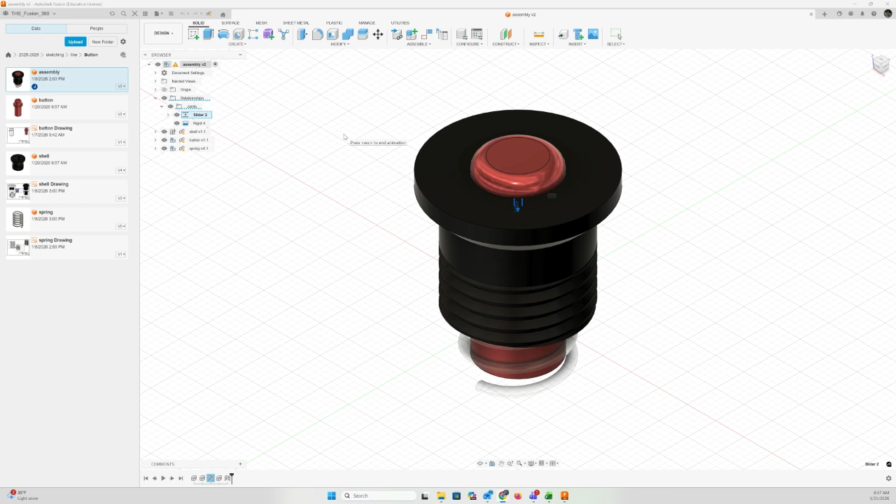We're going to start off with the button first. This is our first assembly and our first component. Let's bring up the diagram for the button. We're going to build the button and the shell, taking different approaches to demonstrate a couple different ways of creating things like this. This is actually a pretty simple cylinder we could build up, but I'm going to use the revolve tool in this particular case to demonstrate how the revolve would work.

Let's move this off to the side and get started. There's the dimensions. The first level is 20 millimeters in height, 12 millimeters in diameter for the top and bottom sections. This is 16 millimeters in diameter. This middle section has a little shelf that keeps it from going too far up. 8 millimeters above it, we've got a filleted edge with a 2 millimeter radius.

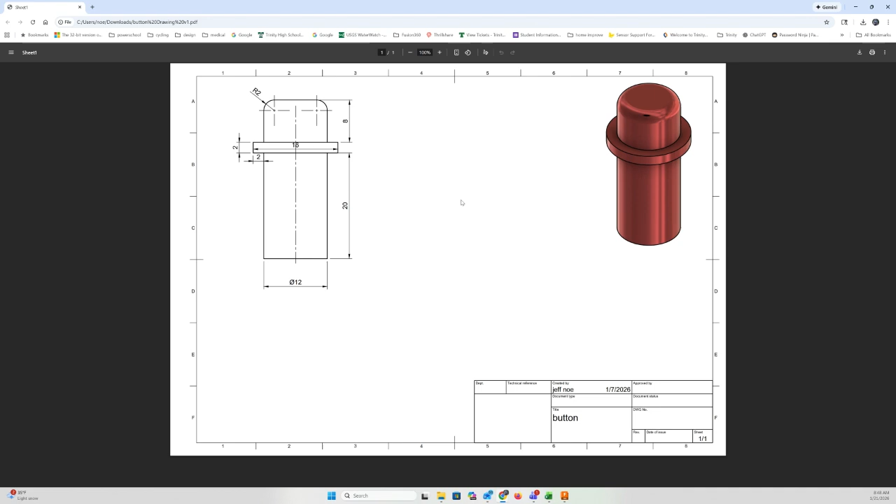I'm going to move this over out of the way. Let's open up a new canvas and create it. I'm going to close the data panel. Let's create a sketch on the front back plane, the XZ plane. Let's open the line tool, create line, keyboard shortcut L. This is our first project, and we're getting into assembly a whole lot earlier.

Now I glossed right over something. I'm going to hit escape and undo, and let's get out of sketch mode. To create an assembly, the first thing we need is a component, because you cannot assemble unless you have a component. What's a component? A component is a collection of bodies and sketches. It's kind of like a pot, a holding pot where we can put various bodies in, and a component can then be used in an assembly. You cannot assemble without a component.

So a component is higher on the scale than a body. A body is a three-dimensional object, so a component can have multiple bodies in it. The first thing we want to do is create a new component. What I did is back out of my sketch using undo, and now I'm at create new component. All I've got to do is name my component. I'm going to name this button. Click OK.

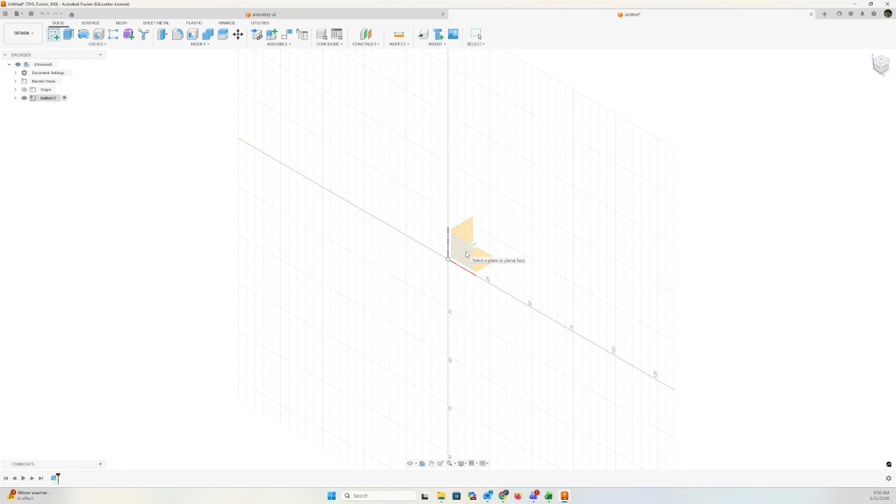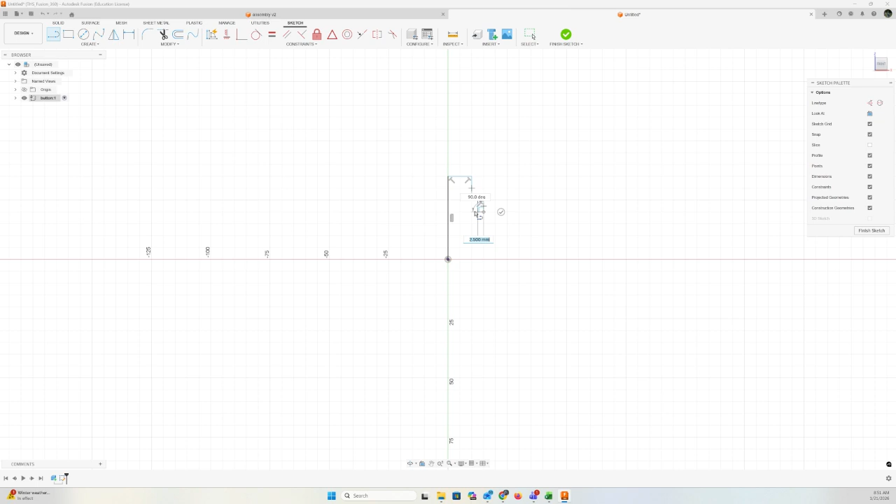Let's start right here on the origin. Click, I want to go straight up. Just go, that's too high. Click, over, click, go down, click, over one, click, down one, back over one, click, straight down, click, and back to the starting point of the origin, click. So I drew this shape using the line tool.

Okay, it's enclosed. Now we're going to use the sketch dimension tool to make sure it has the appropriate dimensions. Let's go create sketch dimension, keyboard shortcut D, there's the shortcut in the toolbar. Now let's go ahead and set the length of this line right here, so I'm going to click on the line and come out.

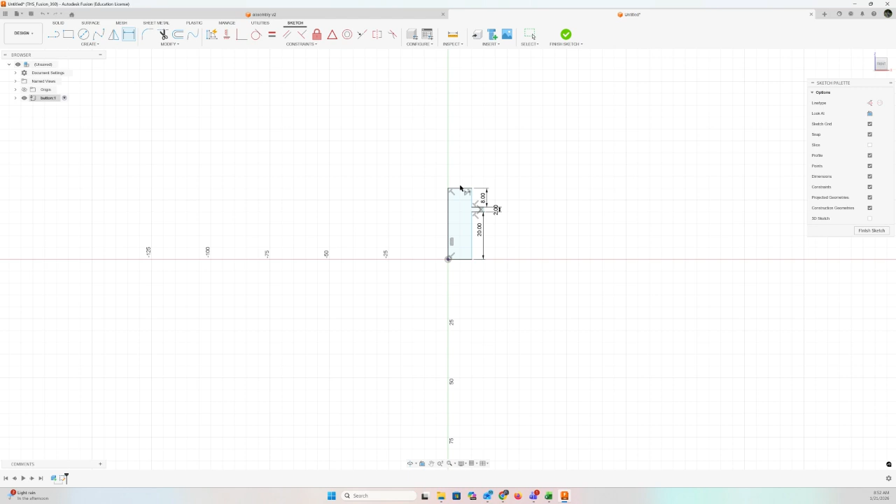That should be millimeters, your original distances will probably be different than mine. This line should be 2 millimeters, so I come out, 2 millimeters. Next, this line should be 20 millimeters for a total height of 20. I want this line, the diameter is 12 millimeters. So this line goes up the middle of our design, this is going to be 6 millimeters, half of 12. And I want this down here to be 6 as well. Last but not least, I want these two lines to be 2 millimeters.

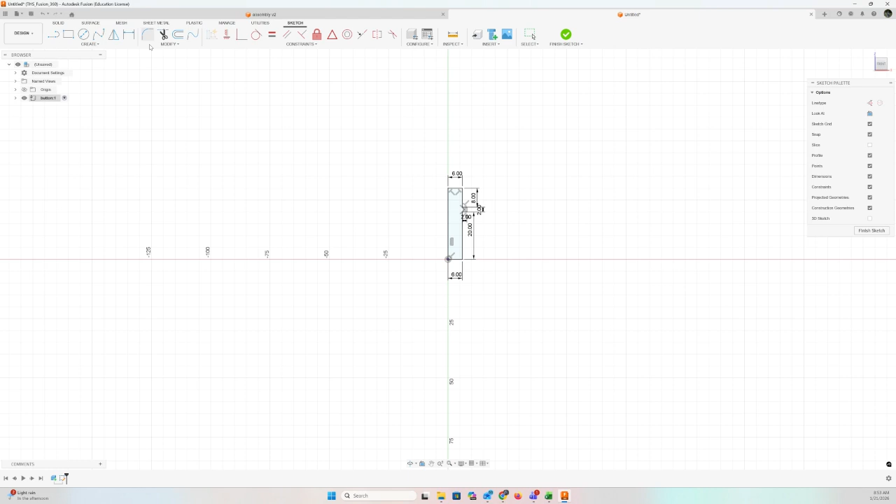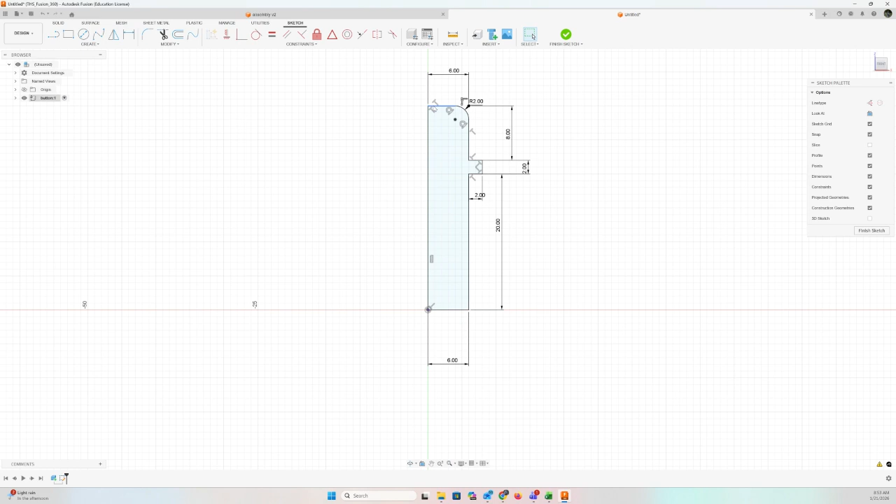The other one came in because they had perpendicular relationships, constraints on them. Okay, I'm going to escape out of my dimension tool. Everything looks good. The last thing is I need to put that 2 millimeter fillet up in the corner. I'm going to zoom in so you can see it better. So 20, this is 2, up 2, back over 2, up 8, fillet. Looks good. Finished sketch, home position.

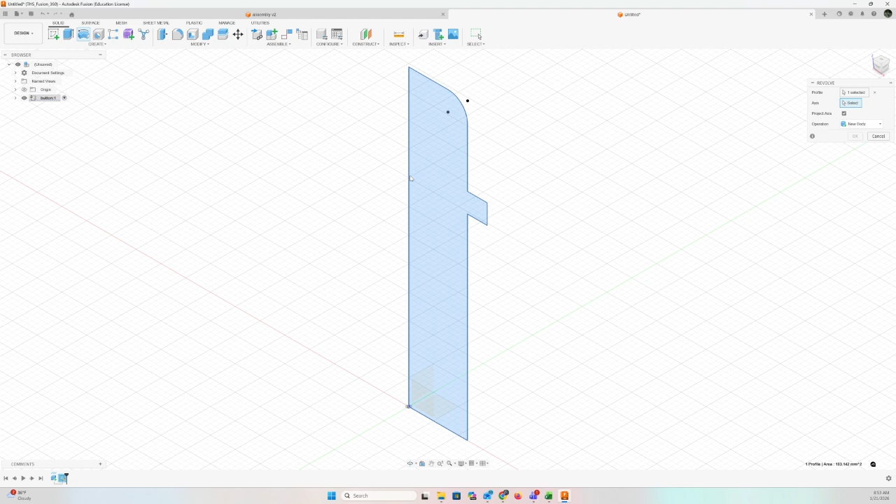Let's go create, revolve. My profile is selected because it's the only thing there. I'm going to select the axis I'm going to revolve around. I want to go full 360 degrees, new body. Let's click OK. Now, what I want you to do is give your...

Hold on a second, I'm trying to find my recording. It must be in here somewhere. There it is, new recording. Sorry, no, wouldn't have been able to stop it if I didn't find that.

Save your file, your project. This is going to be the button. I want all of your pieces in one folder. So we're going to build 3 components. Now notice here at my browser, button 1. If I expand button 1, here I'll find my bodies, there's my body and my sketch. They're now under this component, and we'll learn later how to assemble these and make them a component.

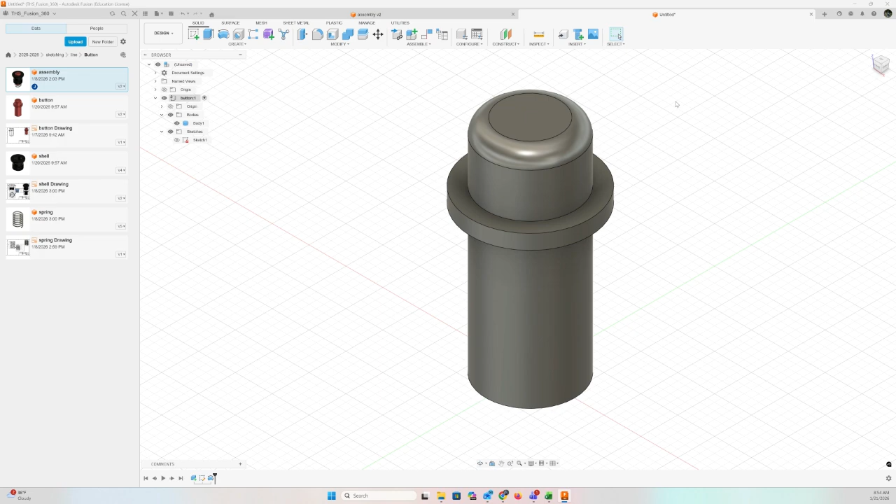So there's my body. I'm going to right click, appearance, and I'm going to drop this aluminum on it, close, and we are done with this component. We'll start the next video and we'll do the shell. All right, I'll see you on the next video.